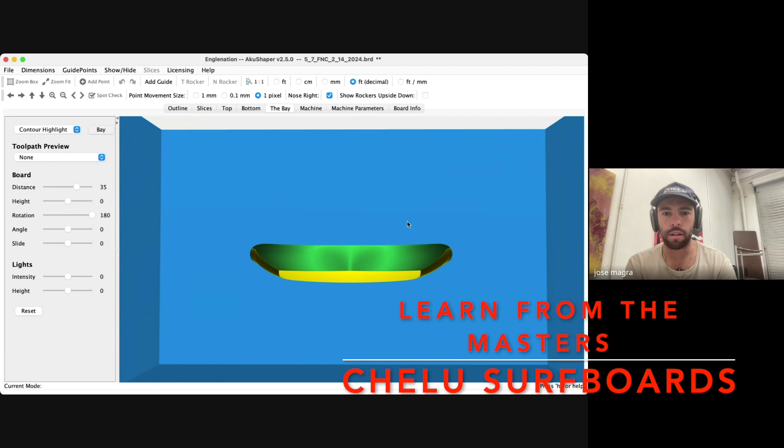And you would think that's a bump, but it's really not, because if we go to preview bottom cut, it'll show you the cut passes. So it's really just the blade moving over. It's kind of acknowledging that wing, and it's just slightly given a shift.

How's it going? My name's Jose Magra, co-owner and operator at Chelu Surfboards here in San Clemente, California.

San Clemente is a peaceful community of Spanish architecture bumped up against 5 miles of coastline. Most remember it as the site of the Western White House, where former President Richard Nixon would go to escape the pressures of office. The heart and soul of San Clemente is more than its laid-back atmosphere. Here is a city with a rich tradition of surf energy. Whether it's famous names from California's early surfing history or hot new pros, you find it all right here.

We've been a glass shop in town for a little over 25 years, and just took over a local Aku shaping machine here in town as well a little over a year ago almost. And here with Nick from Aku Shaper, just going to kind of show a few things that we do with Aku Shaper and show you guys a few of our models that we have and kind of go from there. Sorry for the noise. We're in the cutting machine right now, so got someone in the background shaping.

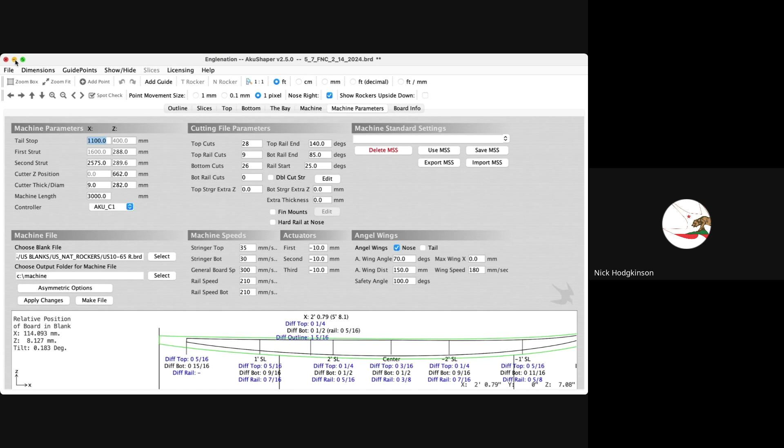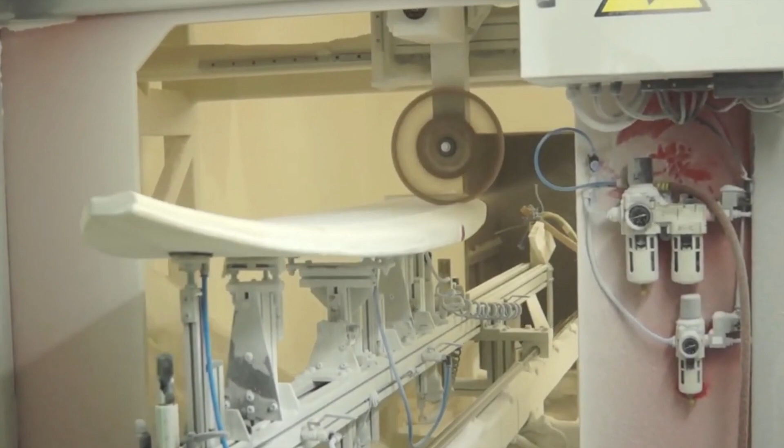Let's throw this on real quick. That one on there now is just coming off the machine, yeah? Just coming off. Yeah, I just finished this one up. Yeah, sweet. Cool.

So yeah, this is one of our go-to fish models, kind of your more high performance-y retro mix fish, a little more pulled in tail, pretty not aggressive nose rocker, but still kind of closer to your shortboard nose rocker. So your entry point's still pretty playful, not catching your nose as much.

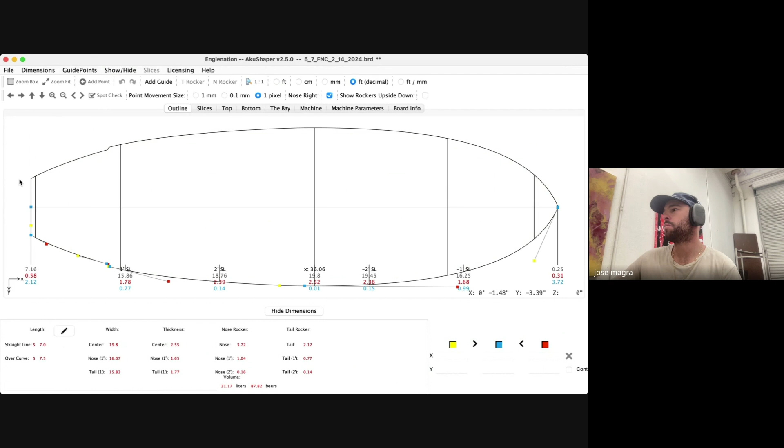Goes from just a nice flat concave in the nose to a little V, like a double concave under your feet in the back, to a little V out the back, and it kind of flattens out at the end of the tail. Yeah, kind of tried and true model. Surf this thing in a lot of different places over the world, and it works really good, especially for some of the people that have bought it.

Where do you start off with when you're putting a board model together? I mean, rocker's super important. It all depends on kind of what the person's going for. There's various different rockers for different types of surf. Like if you're just surfing local beach breaks and nothing too crazy drops, you can kind of get away with a little less rocker. But if you're surfing pretty punchy waves and a little more aggressive surf, you do want to have a nice entry point and a nice exit point, because that's where a lot of your momentum comes from.

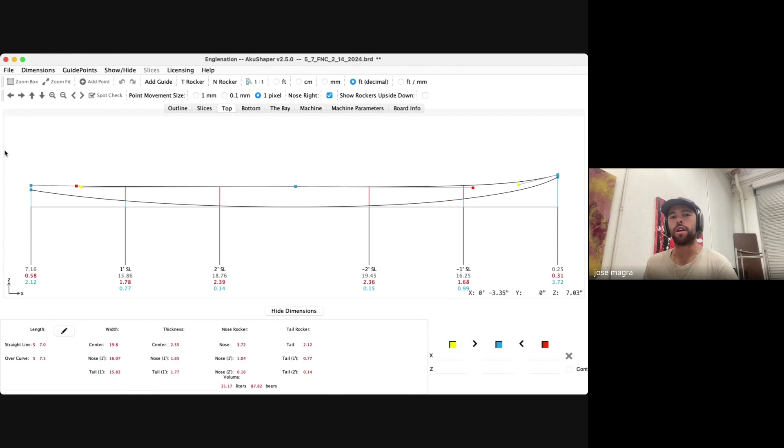Yeah, so we're at almost 3.75, or we're at 3 inches and 3/4. So you're at 3.75 almost on this one. But yeah, the entry point on a nose is super important, because if it's too flat, you're going to catch. You'd have to kind of wheelie down the nose a little bit, or wheelie down the face a little bit.

So what that entry rocker does, it just kind of helps smoothen out the transition from when you're paddling to standing up. Hopefully don't catch your nose, and kind of helps keep that momentum going. So how are you putting your rockers together though? You just kind of pull some stock down and... Yeah, I mean, I kind of go off of like if someone came in with a board that they really liked.

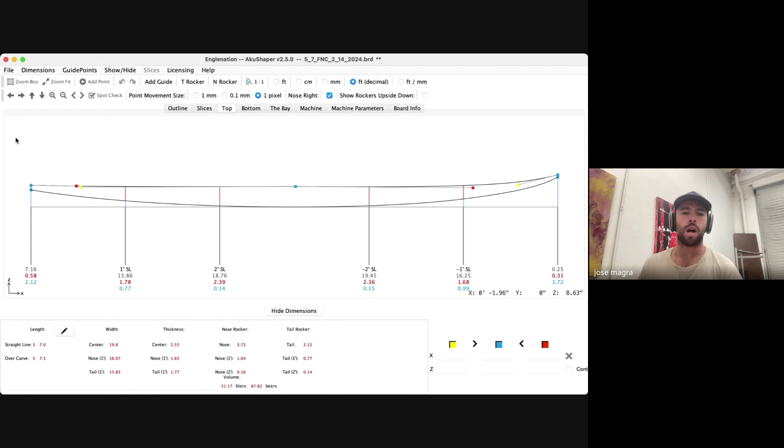You say, wow, Jose, this board's kind of magic. Can we kind of go off of this, but you can kind of do what you like to it? I'll take it. We got a rocker table here in the shop, so you can lay it in the rocker table and take measurements every like 6 inches or so. We take measurements and kind of feel it out and see what type of rocker profile that board already has. And if it's something that really works for them, then we'll play along and keep that same rocker so that they're still used to that same feel.

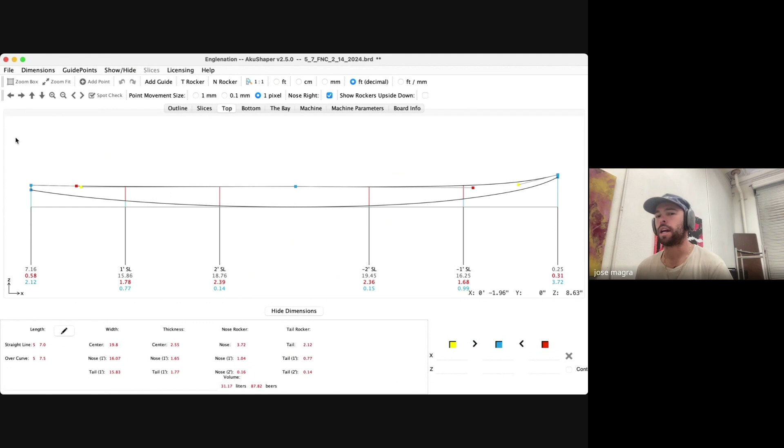But they could be like, hey, I'm kind of grabbing on my rail right here, or kind of catching when I go to do a bottom turn. Then you start getting into the rail preference, rail profile, and start tuning that up too.

Obviously, there's your standard tail and nose rocker right up here. You can always just click on that and grab the nose rocker, and you can pull it up. And that's going to slowly start bringing up the nose. Like we just went from 3.72, and just in a few clicks, you can already change it pretty quickly. And that's kind of your standard nose adjustment. It's kind of bringing up the whole board.

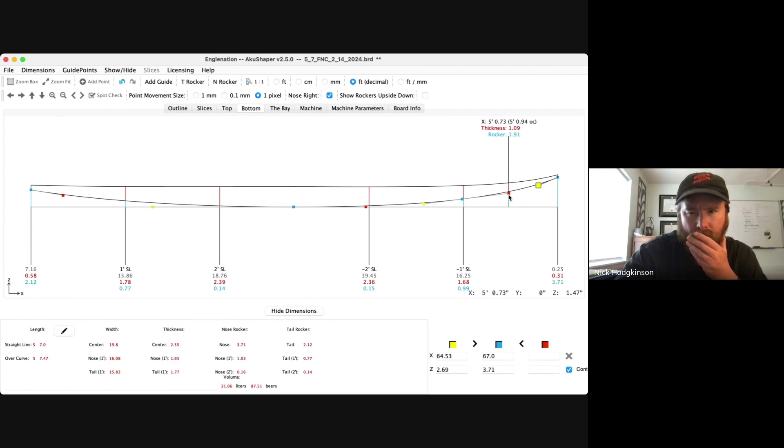So I can go back to where it was, and then we can click on bottom. And then you have your guide points right here where, let's say the person just wants a little more flick in the nose, then you can adjust that one guide point and click it up a couple clicks, and that will thin it out a little bit in that spot, but you're still adding rocker by doing that, but only in that one certain spot. Or here, you got your other guide points. You can take the control off and kind of play around with that.

But at the same time as you're doing all that, you do need to justify the movements you're doing, because you don't want to create a bump in the bottom of your rocker. So realistically, my adjustments, I'll either just come in and click on the nose rocker and just bump it up a little bit and kind of see how much it moved.

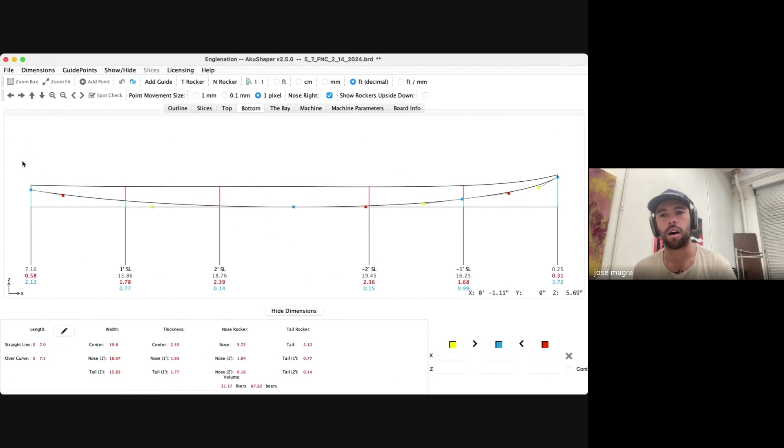You do want your center point to still have, not going to say a crazy amount of surface space to touch, but you still want this part of the board in the water, because that's what's giving you the momentum and the speed. When there's not enough here touching, it creates more drag and you don't have as much surface area touching to give you that speed that you need. You don't want to increase the rocker so dramatically to where the board's not even going to work. Too much rocker will create too much drag where you are gliding and surfing the board.

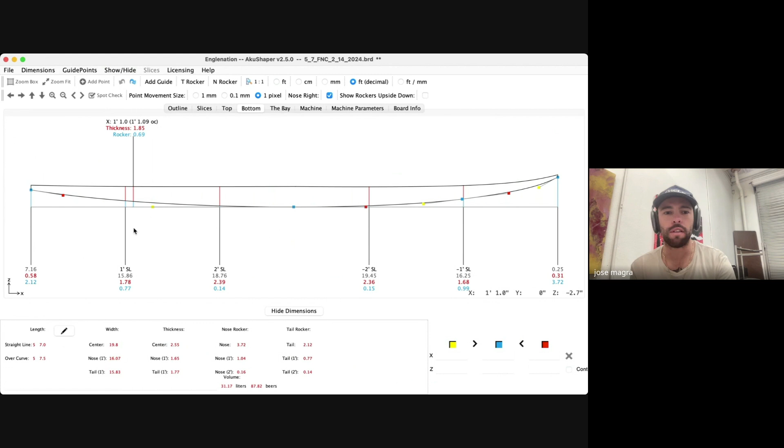So you do want to keep that at a solid base, like here, especially once you're standing and your feet are on the board, your board does sink in a little bit. So, majority of the board, from this guide point to maybe a foot from the tail, that's what's really touching the water. So I'll just tweak the rocker here real quick so you guys can see what I think too much rocker for this style board would be. And then it just kind of looks like a banana.

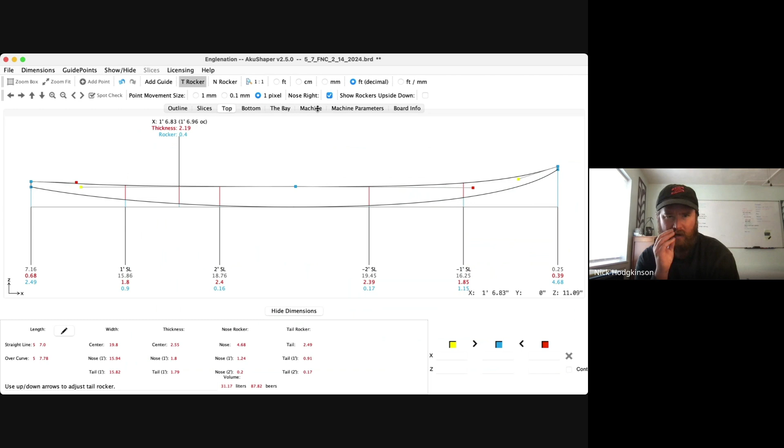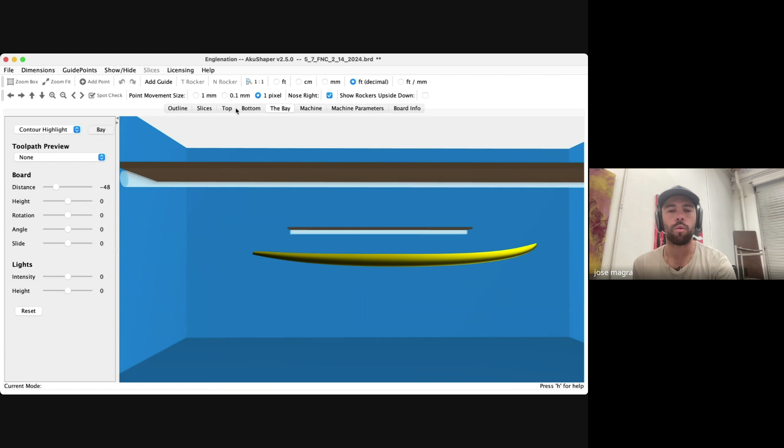Well, and it goes back to that planing area that you were talking about too. Yeah, see, there it just looks like there's way too much rocker in it. The only point really touching the water is going to be this 1 foot of the board. So all the water is catching underneath this part. The tail might not have enough push through the water. So we can go right back and just click undo. And you can see back in the bay what that looks like. To the eye, that looks a lot more pleasant than the rocker before. You have a nice smooth transition on the deck.

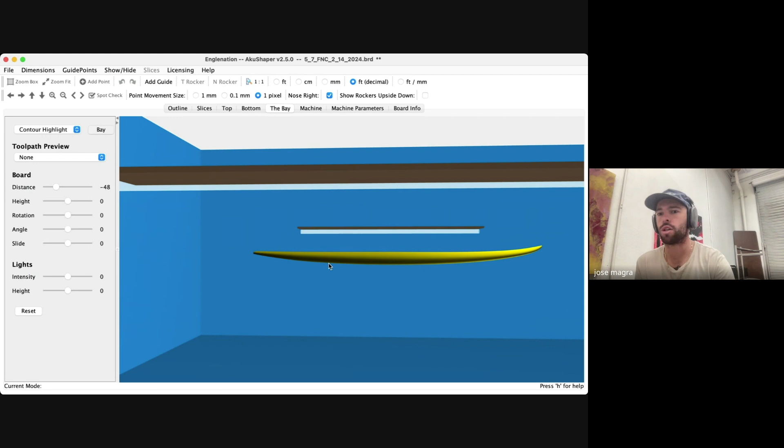Your rocker on the bottom looks nice and smooth. And then now it looks like from here, which is about, I don't know, 2 feet to 2.5 feet from the tail to about 2.5 feet from the nose, this is the spot where a lot of your board is touching the water, and you want that in the water. You know, that's like what's pushing you forward and creating the momentum that you want.

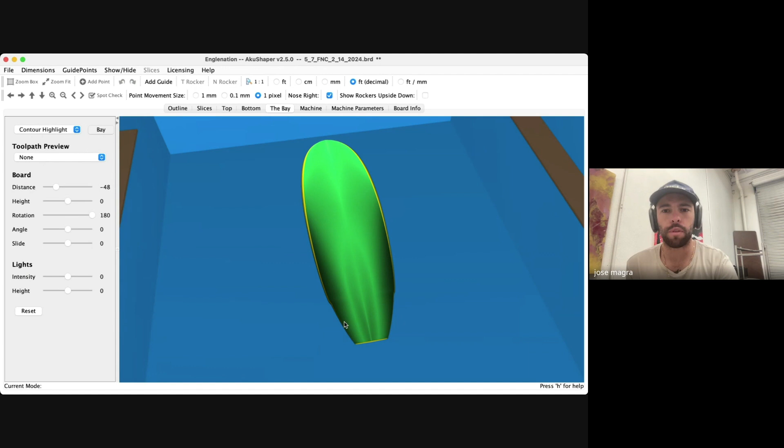Well, and you also mentioned that we're looking for bumps, like in the rocker profile. Yeah, so normally a bump, like obviously you can see here the small contours that we create, right? So like the deck or the bottom towards the nose is a little flatter. You have a little bit of a double concave right here, not crazy. And then you got that V out the bottom. So this is going to kind of help you really drive through the water, push through, super playfulness.

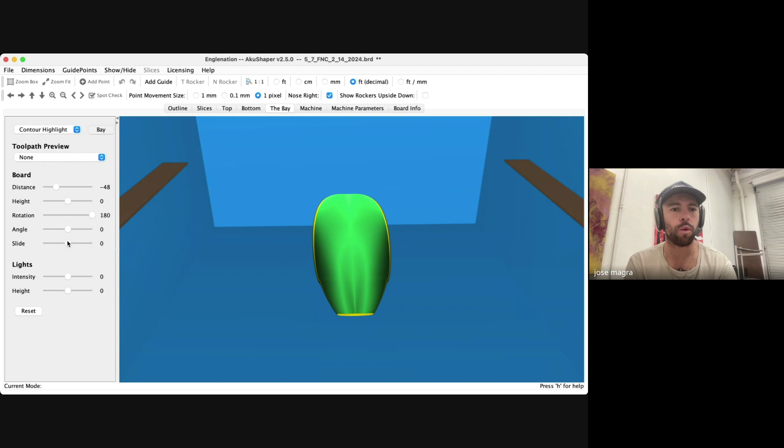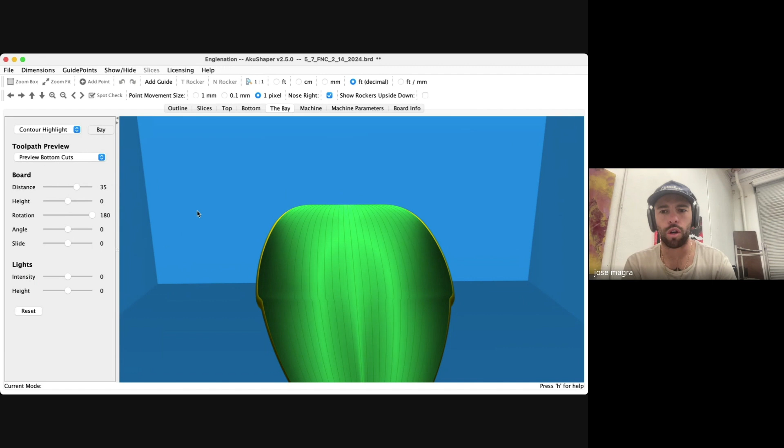And when I say like a bump, so right here where the wings are, you can kind of see a small impression right here and here. And you would think that's a bump, but it's really not, because if we go to preview bottom cut, it'll show you the cut passes. So it's really just the blade moving over. It's kind of acknowledging that wing, and it's just slightly given a shift.

You can go into your slices and come into where that wing is. You could create a slice right where that wing is, and maybe just, here, we can do that real quick. We'll just add a slice. Or before we do that, you want to get your measurement of where that slice is. So we'll go back to here. About 9.69. I normally start my wings at about 10. Bring in the small point a little less than a half inch back.

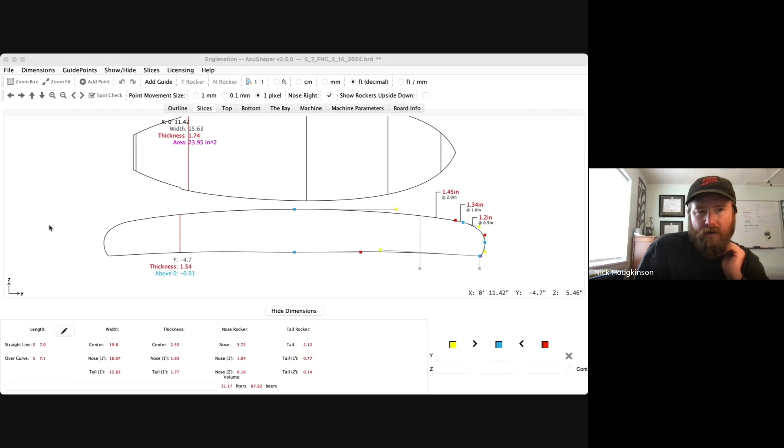So you can go add new slice. We're going to switch over. Put one at 10 inches, which is the very beginning of the wing. And then add a new one at 9.7-ish. It was like 9.69, 9.68. So those are your two slices for your wings now, right?

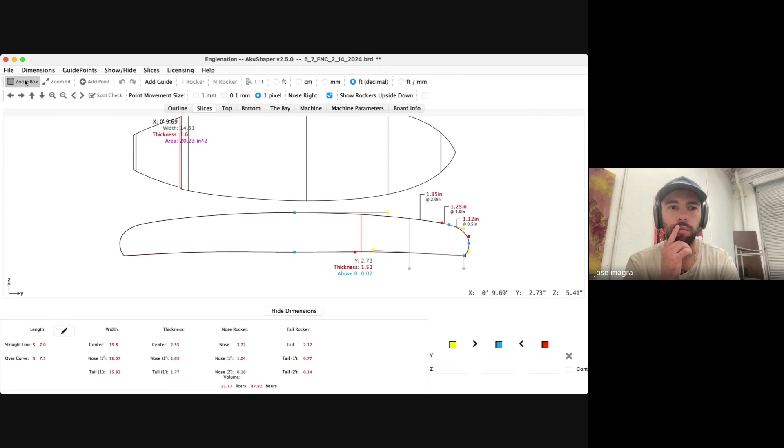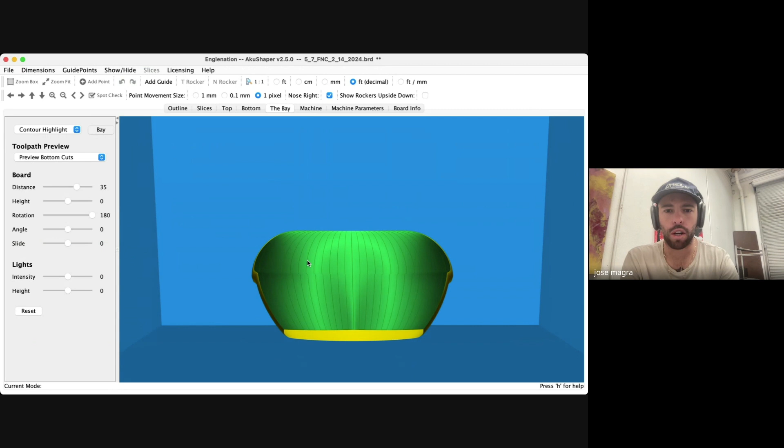So you could come in here and click on zoom box and just come up. Wrong click. So you can come up on the blue guide point and just give it a tap or two up. And that little bit of a shift will then slowly start taking away this little bit of a bump that's here. But if you start playing around too much with that, I'll show you the consequence of playing around too much with that.

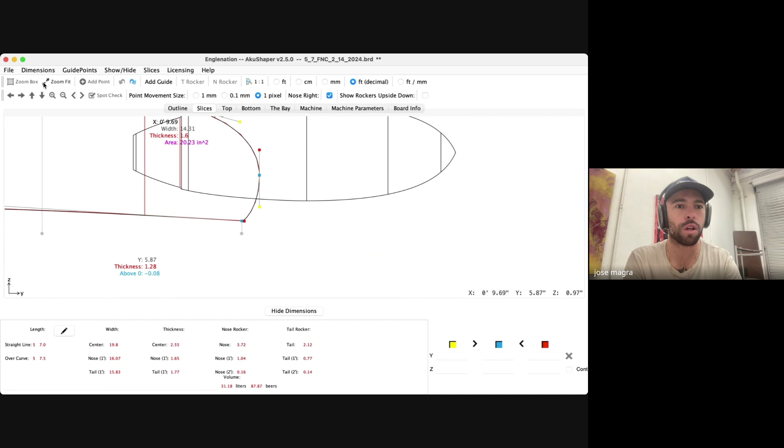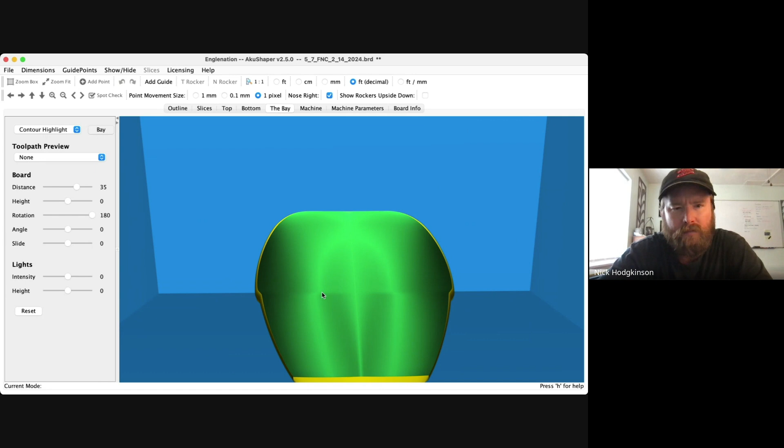I don't know why that guide point's all the way over there, but okay, here we go. So I'm just going to do something dramatic just so you can see the difference. And this is what is going to create a bump in your outline. So now you can visually see right here, there's two dramatic differences here. Yeah, through that. And concave, especially in this, yeah. So like, if you go too much, you can see here, there's some pretty dynamic contrast.

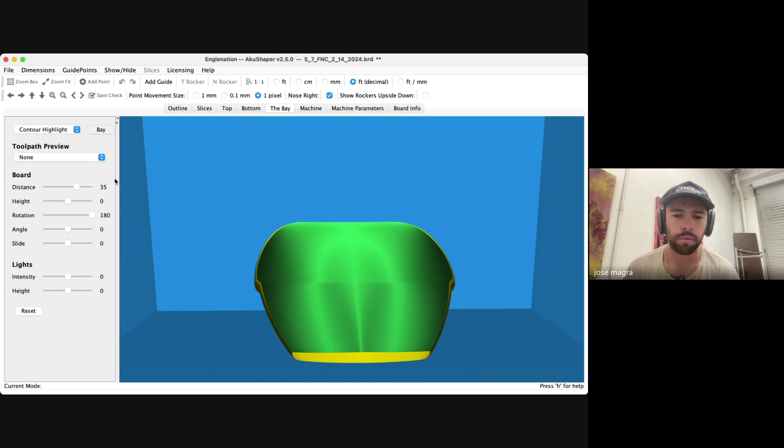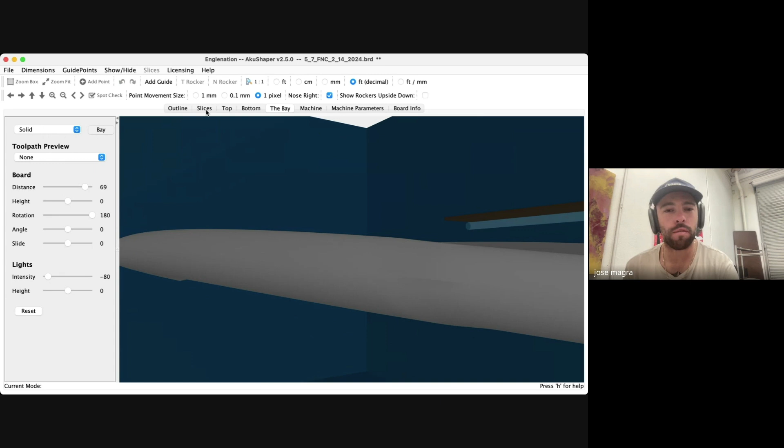So like, right where I did those clicks, I just created a divot in the board. So now this is a higher point than this, which you can get into like step ledge situations where there are some boards that have kind of like a step ledge like in a boat hull. And that kind of creates a little less friction. So, I mean, to the naked eye, you might not see this, but right here is lower than this point right here. So those few clicks created a divot to go down. And then that's just going to add more headache in the shaping room and that kind of stuff, you know.

So, before I forget, I'm just going to get rid of these because I don't really, you can do all that. I don't really play around too much with adjusting those highs and lows, just because the software kind of almost does that for you in a sense.

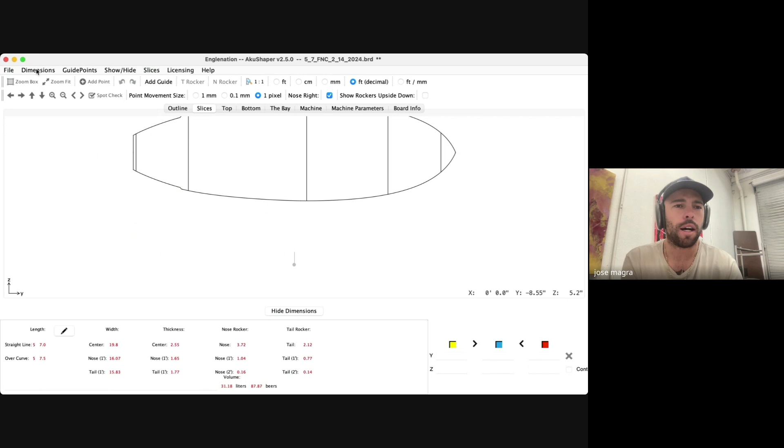Sorry for the coughing so much. Just a little foam dust in the throat.

But yeah, I don't really play around too dramatically with that. Like, what are some problem things that people bring you? It just depends, really. I mean, I cut a board for someone the other day, and it had a flat spot in the rail, like the curve wasn't kind of fluid.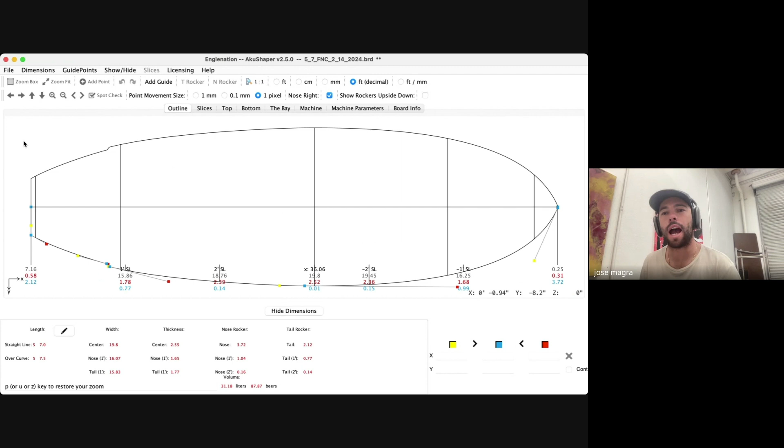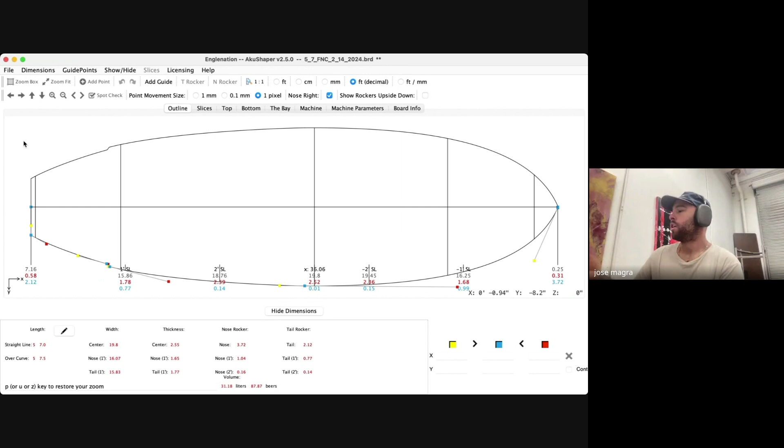They tried adding a little bit of V on the bottom, and I feel like they did it from the wrong point. So then when you go to send it into the file to cut, the software is interpreting one thing, and I don't think it's necessarily what it should be. But that's just kind of user preference, you know, like some person might want it to come off from there and not from the rail.

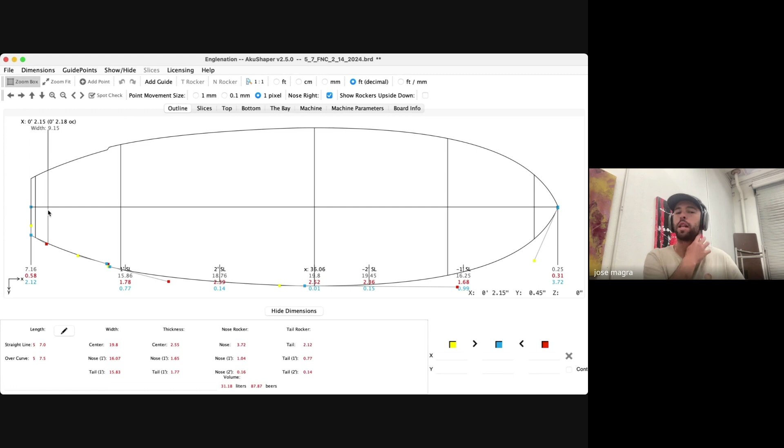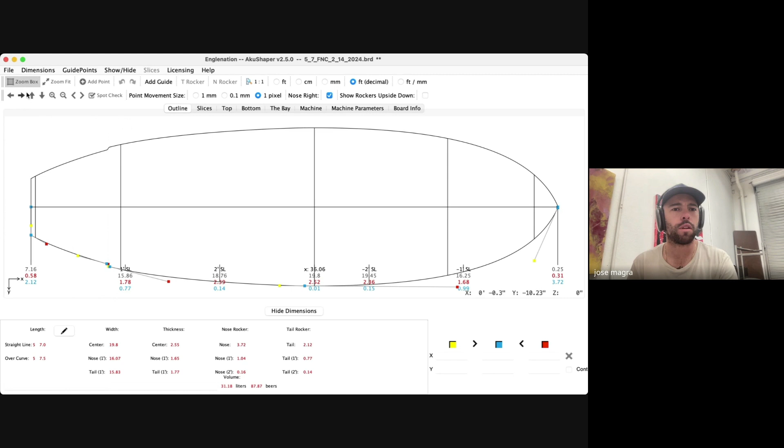All right. So, adding a wing on a surfboard, it's more just to create a release point. Normally I like putting my wing right behind the trailing edge of the fin. So depending on how big or small the board is, it plays a factor on where your fin placement is. On a twin fin fish or a 2+1 setup, when I say 2+1, it's a twin fin with a small trailer in the middle, fin placement's kind of crucial, and the release point of the wing plays a part in how the board's going to perform.

So I have my wing at about 10 inches, so that kind of gives you an idea of where I place my fins. And we'll just zoom in on this one little section. So obviously you go to add guide point, and you click your spot where you want to add it. My spot is obviously here at about 10 inches, and my other guide is at a little less than a half inch. So I'll add a guide point here.

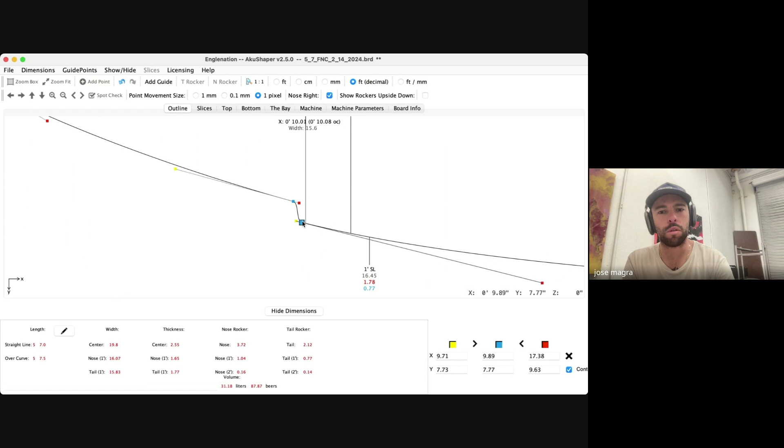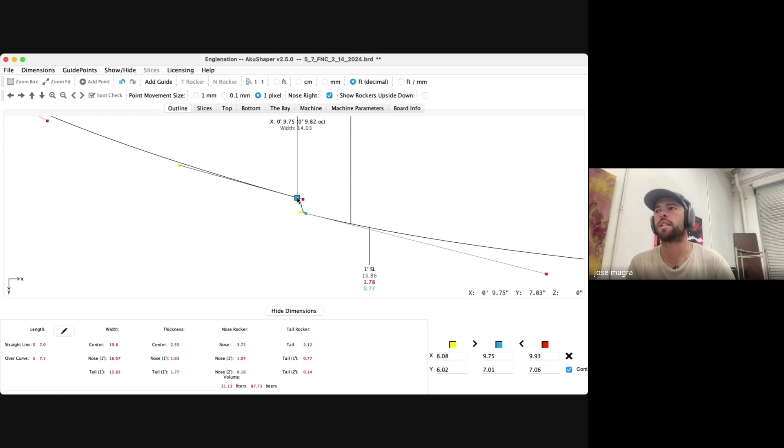You can play around with it and put the wing how you want it, and then create the tuck: how sharp, how soft, a little bank wing, or you can do a pretty sharp wing. Obviously, once you get into the machine side of things, you can slow the machine down. It can read where the wing is, and it'll slow it down for you, so you're not just chewing through the board.

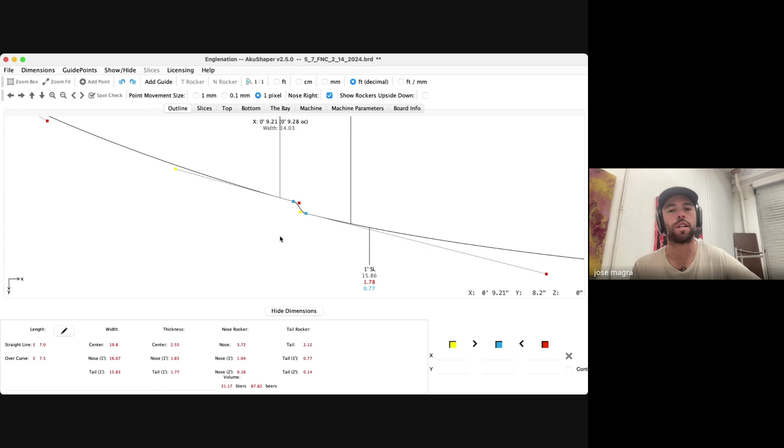And yeah, little subtle changes go a long way. It doesn't need to be something too dramatic, because once you're in the shaping room, you can adjust it how you need and how you see fit. And whatever adjustments you make, you just take measurements off that, and then you go back into your file and adjust it to what you liked, you know?

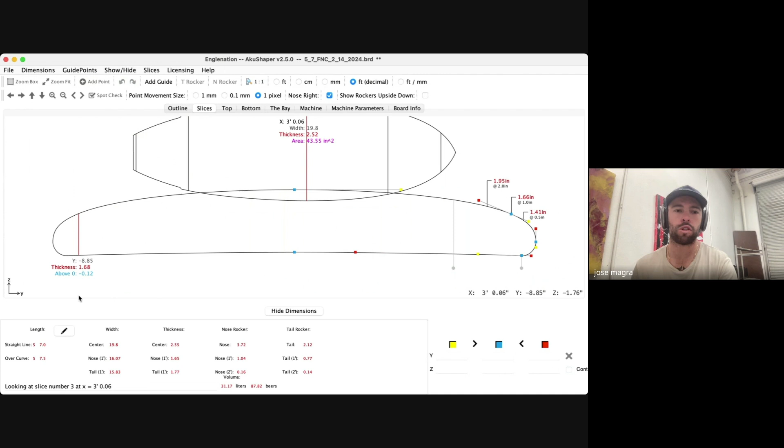But yeah, so creating concaves on the bottom. I normally put my concaves right where the fins are and out the tail. The middle might have a little bit, but nothing too crazy. As you can see, right dead center of the board, there's very little concave here, maybe a small single concave. And then up by the nose is pretty flat as well.

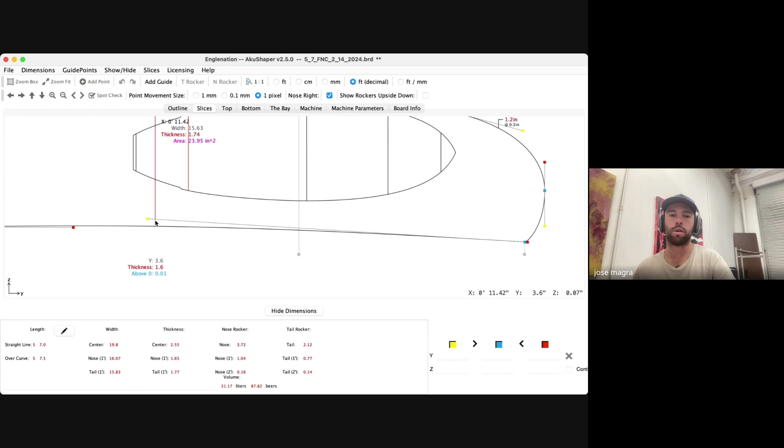But back to where I normally put them, I like playing off of the rail, because in this section right here, from the edge of your rail into your stringer point, you're creating kind of a vacuum for where the water is going to push through. So with this guide point, you can play around with that, flatten it out, draw it out, bring it more towards the center, bring it more towards the rail.

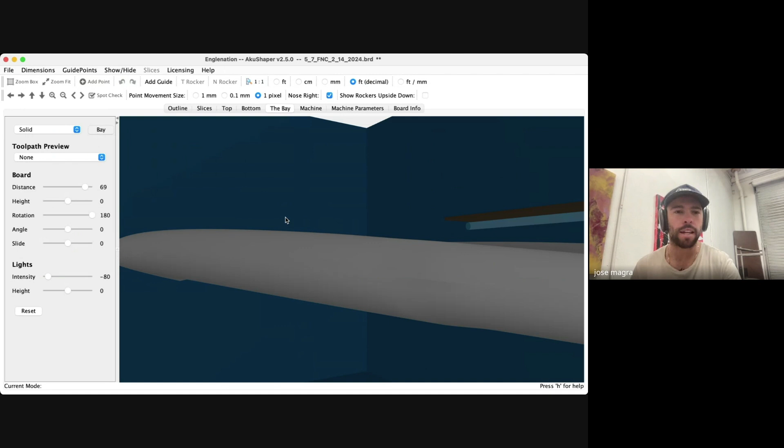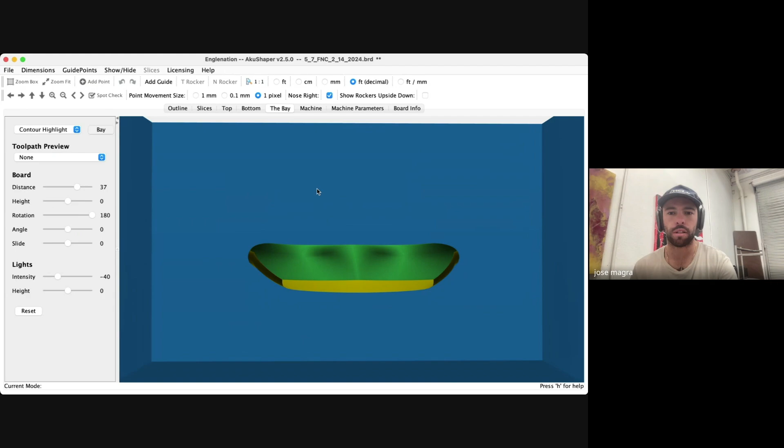I can show you what that looks like in the bay. We can just pull this thing way up so you can see what that did in relation to the concave now. So you can see how dramatic it is on the rail now, especially right in this area. It created a pretty big dramatic difference. Here you can see how dramatic that really looks.

So again, less is more. It doesn't need to be something too complex to get the performance you're looking for out of it. Yeah, so for me, when I look at this file, one, I think there's way too many slices. The more slices you put in, the more complex the file gets to the computer. So you're adding more area for the computer to complicate itself more than it really needs to.

All right, so first glance, obviously the outline's pretty out of whack. I would say there's a few things that can be adjusted, but first thing to me is there's way too many slices on the file. So that creates more chances of error when it goes from the shaping software into the cutting software.

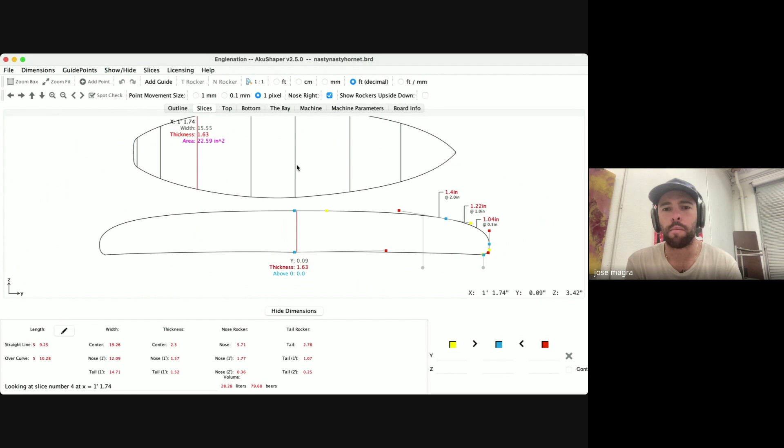And like I was saying, less is more when it comes to slices. Normally I put a slice at about a foot, one in the middle, one about a foot from the nose, and one an inch from the nose, and one an inch from the tail. So this one is almost in the right spot. Yeah, kind of. So this slice, we could just move that one to a foot, that's realistically where it should be. This slice, I would honestly ditch it.

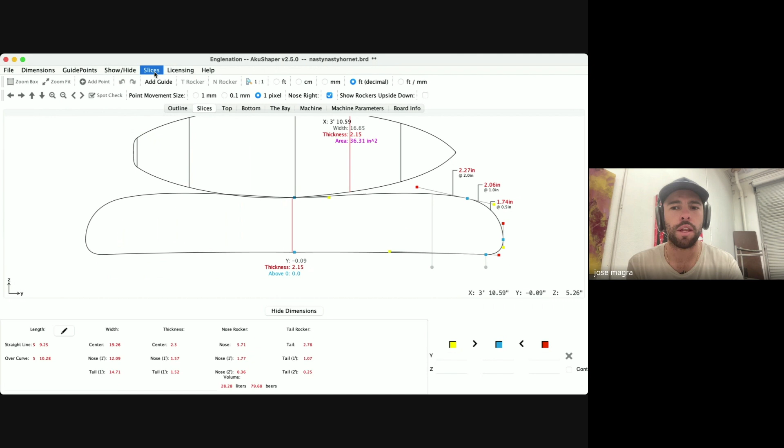This slice, I would get rid of it as well. This one, I'd get rid of it as well. This one, I will just make sure it's at a foot, 5'9" and a quarter. So 5. All right, so here on this board, you can see the outline's a little funky. I would adjust this a little differently.

Depending on where your center point is on the board, where you want the center of the board to be, that's where I play with the outline. This board's a 5'9", so we'll try to put the outline as dead center as we can get it for right now. And then that's where you play with these control points. And just by slightly moving this up and pulling it a little flatter and more straight out, you can see that outline cleaning up a bit, and it makes a dramatic difference.

And then with this other guide point, you can play around with the nose shape, draw it out more, pull it in, bump it out, create a little more volume there. So off the eye, you can see this outline clearing up a little bit, which is what you want. You want a smooth, round transition of curve here. You don't want anything too dramatic, because that takes away from the whole point of the shape.

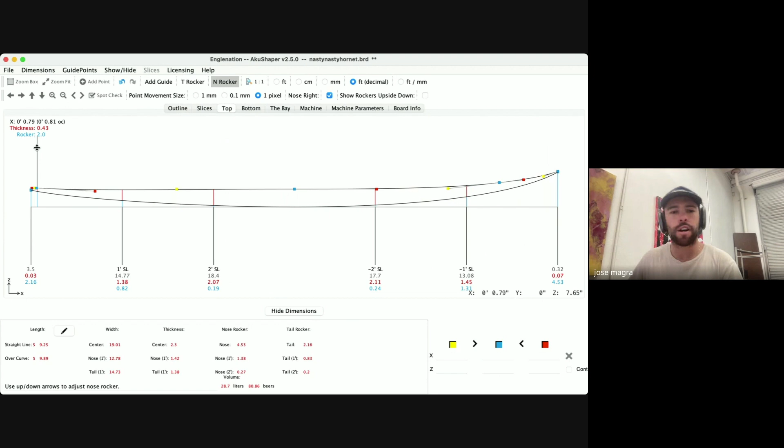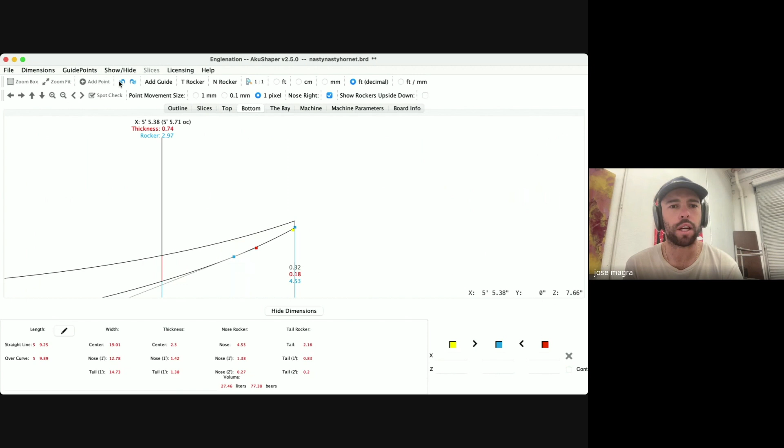And you can see, the higher you go, the more foam fills in on the nose. You're creating a little more volume. Depending on that surfer, you can play around with that. I do that from the top normally, and then on the bottom, when you adjust those little movements, as you see a guide point here, this guide point is actually creating a little more flick off the nose, or a little less flick off the nose. So that's where you can play around with those guide points.

Well, cool. Thank you, Nick, for taking the time and letting me explain a few things that I see here on my side of things, on the operations side.